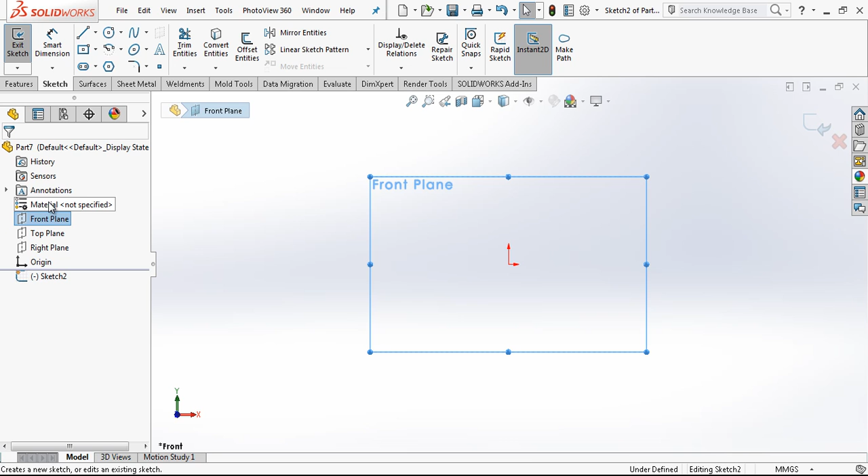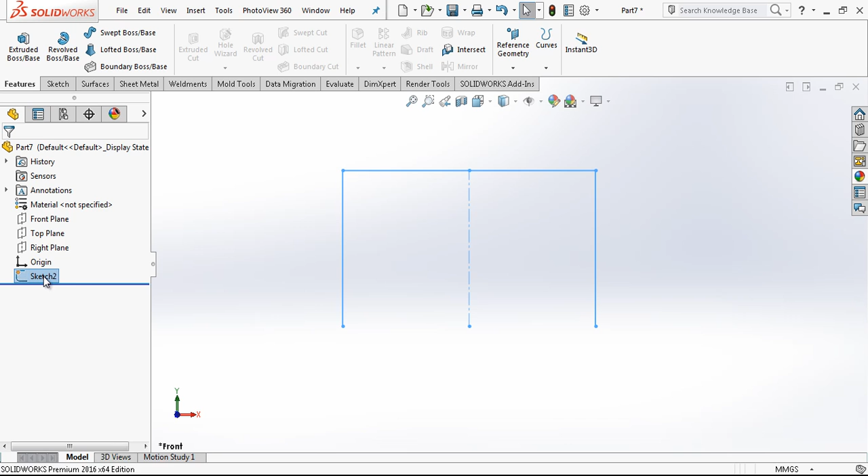Let's start quickly. In a new part, in front plane, I open a new sketch and start with lines. I'll draw half of it and then mirror it. This dimension is going to be equal, and we mirror it. This dimension is 150 millimeters, this dimension is 250 millimeters. As you see, the whole sketch is black, so we can continue to the next step to make an extrude with a line.

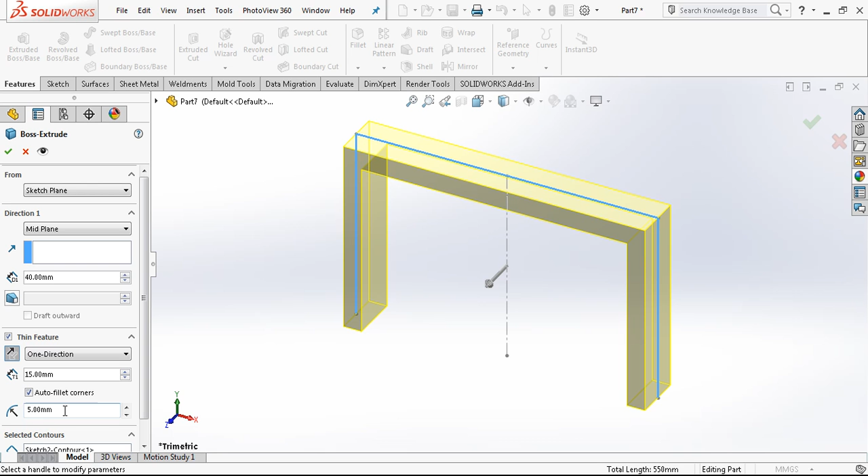To the inner part, we are going to create 15 thick and 40 millimeter wide. The corner is going to be reduced 20 by 20 inside, and ultimately out is 35. Then we are going to put some radius on the edges, 5 millimeters.

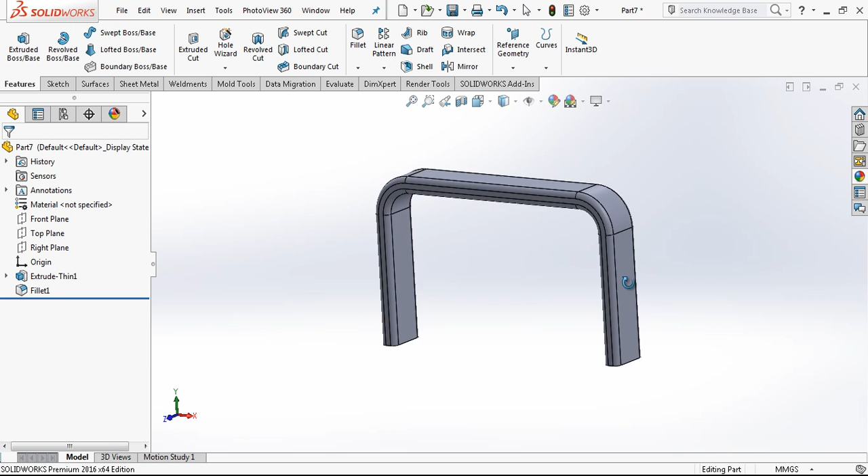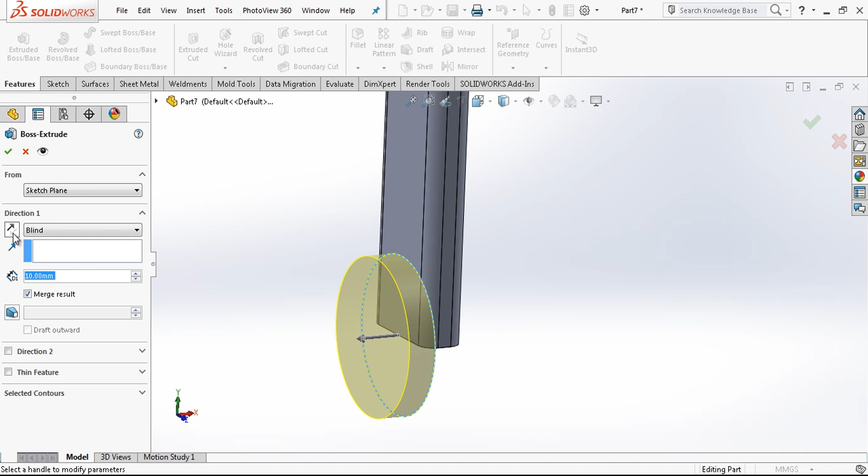That's ready. On the side I'm going to create in the middle a circle which is 55 millimeters, going to be extended 10 millimeters on this surface. The second direction is 15, already the thickness of material.

I want to make a 10 millimeter bow from both sides, equal. Then here is 25, and this is done. Just making a mirror.

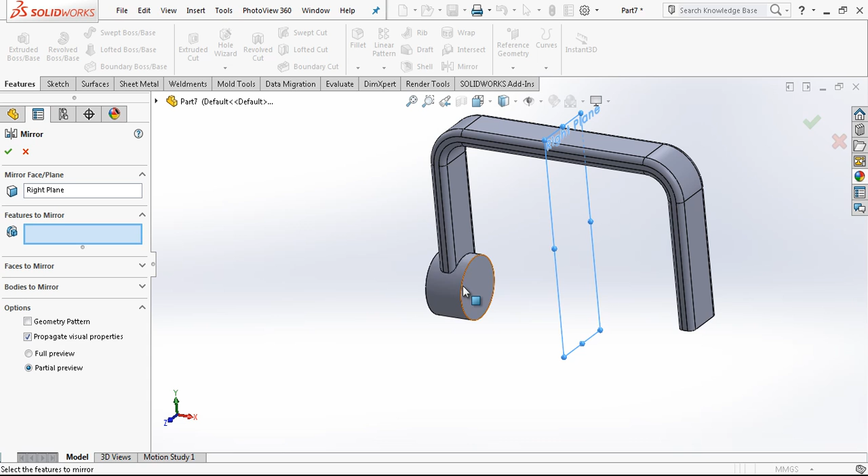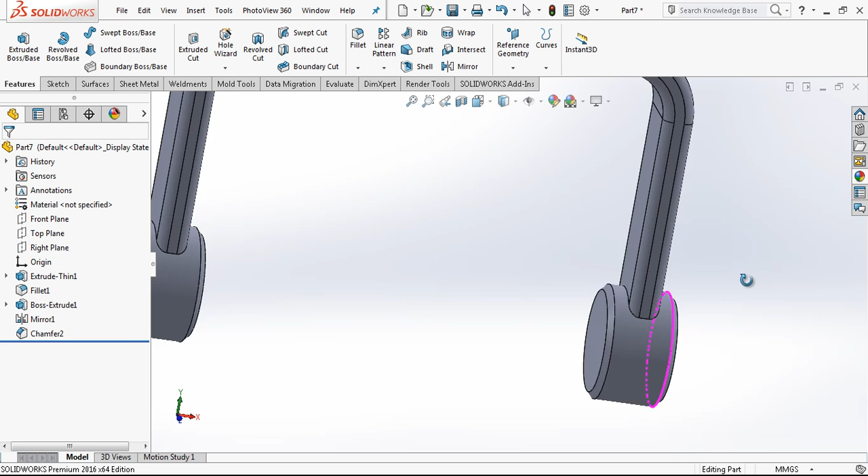Adding some radius on the corner, 3 millimeters - oh, 3 not 30. Yes, chamfer we added, by the way. I was thinking this is a cast iron part, that's why chamfer is not possible. Radius is always better for production in cast iron.

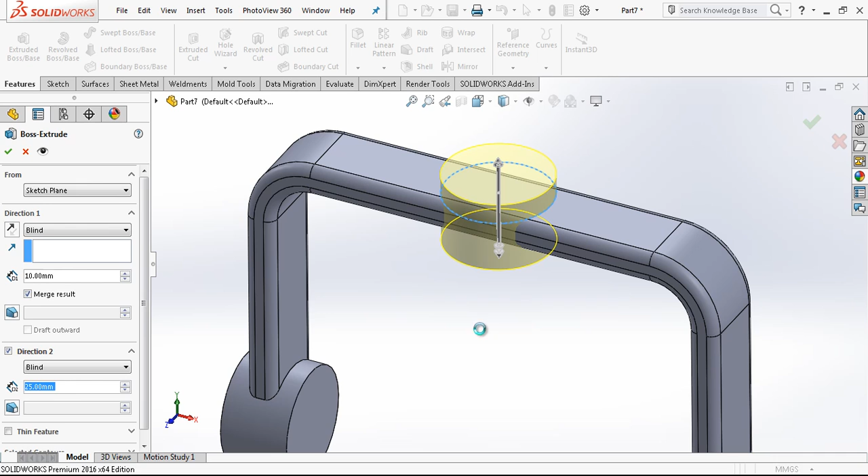55 diameter, we want 10 millimeters from the surface and same 25 at the bottom. This is also ready. I took fillet on the desired edges, adding our 3 millimeter radius.

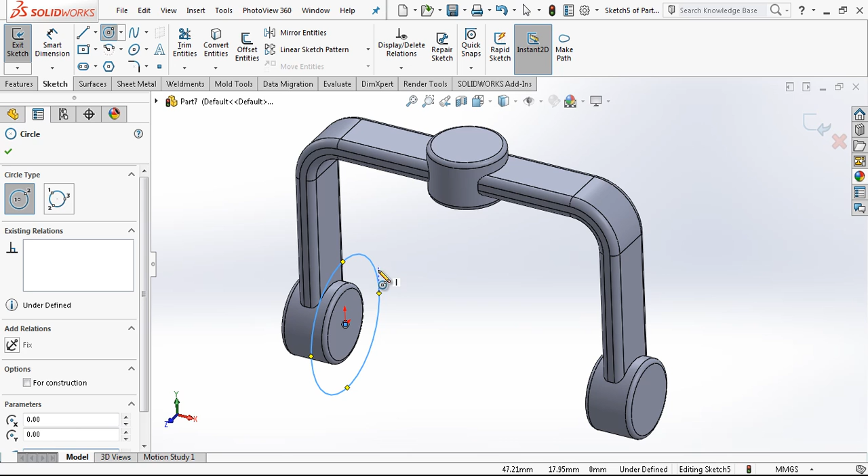On the surface we are going to create a 25 millimeter diameter and cut through all. And then here we create diameter 20. The most important part is now ready, in fact.

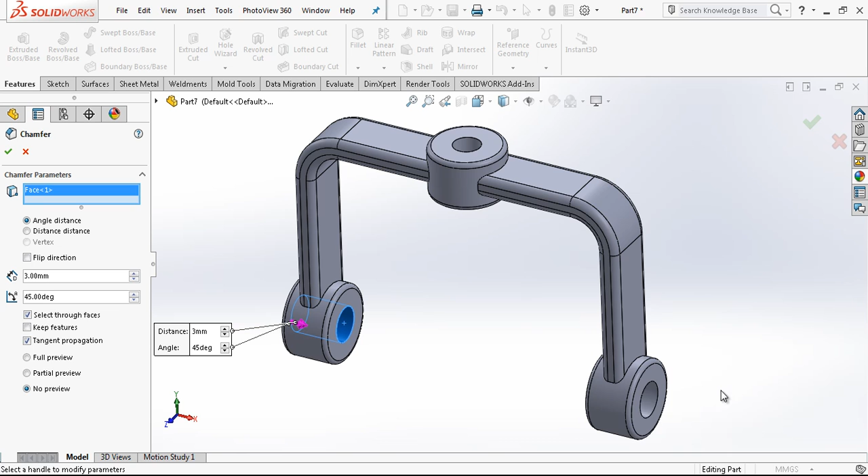We can add here some chamfers. If you have surface machines, then there will always be a chamfer. And we save it, and I'm creating a new folder - A1, let's say, A1 the main part. We keep it here. And the second one.

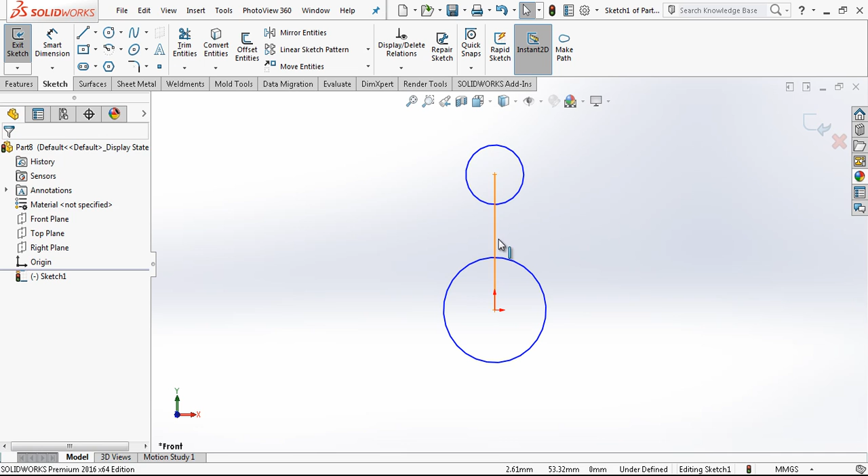We go create a radius, a circle also here. We just connect both centers. This is 75 millimeters, this is 50, this is 35.

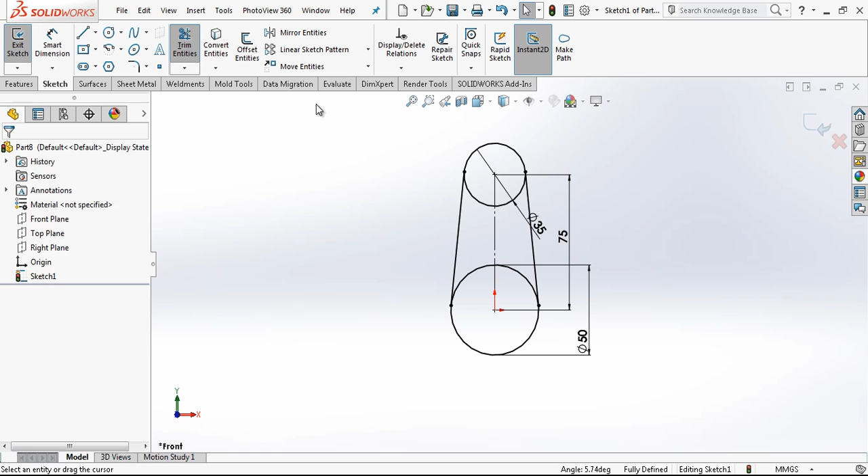And a line with the control button. We just add a tangency relation. With trim we press and remove unnecessary sides, and this is going to be mirrored on the other side, and unnecessary area removed again. Here 20, here 25 millimeters.

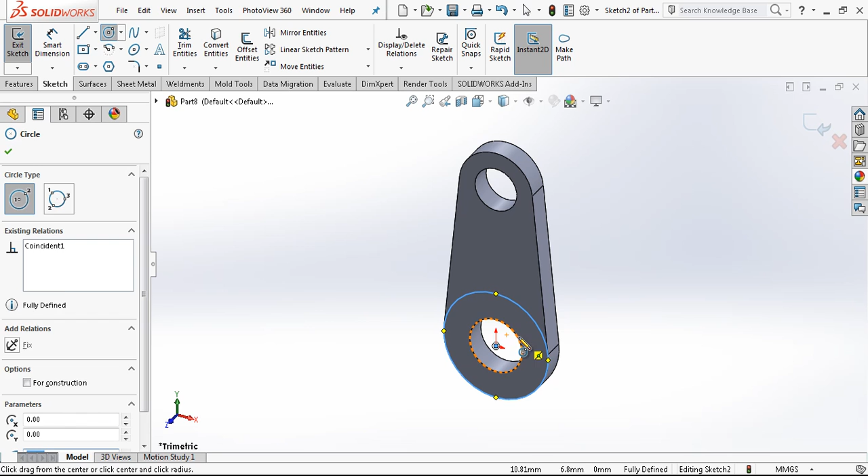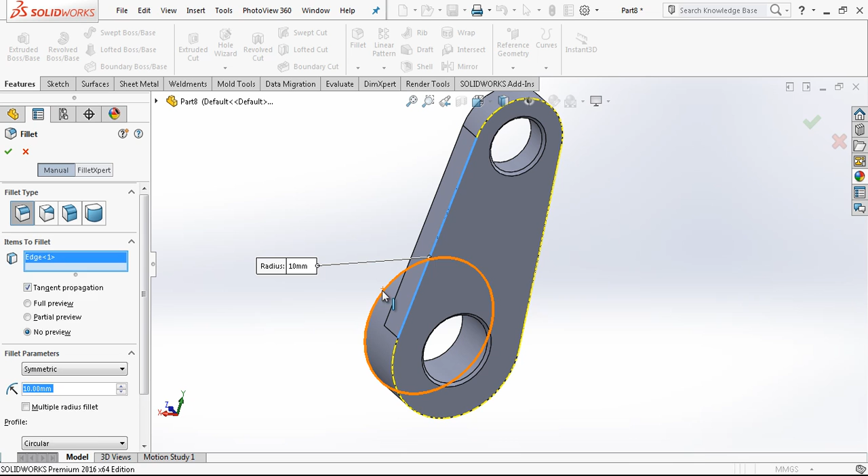Here 1 millimeter chamfer, outer surface is 3 millimeter radius, and here also 10 millimeters. The name of this is A2. A1, A2. Yes.

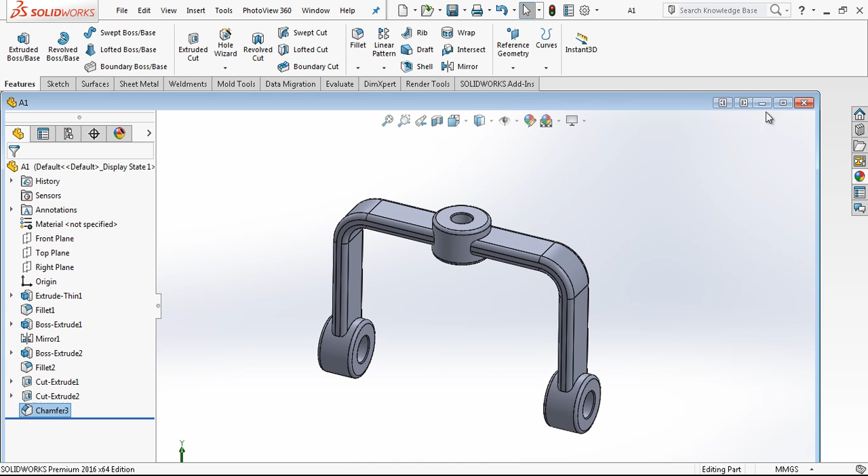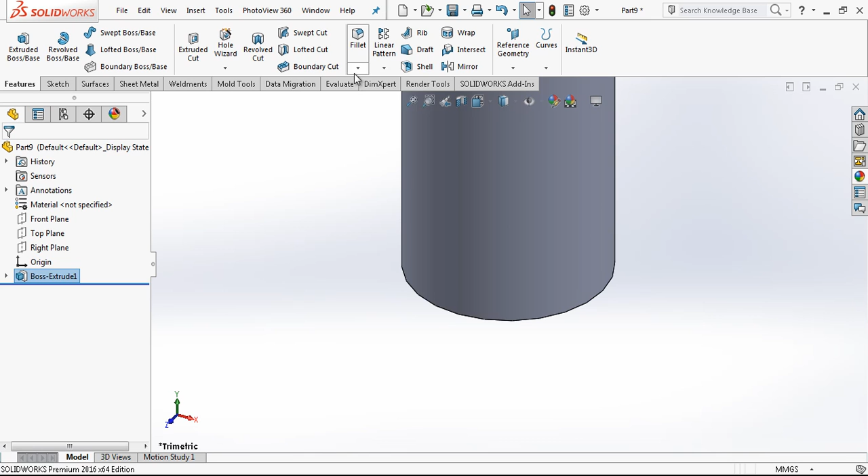Now we create a 25 millimeter diameter axle. The dimension will be 350. With chamfer, I just click on the surface and add 1 millimeter on both sides. The chamfer, because when you select the surface, the related edges automatically get the radius added - the chamfer, sorry. A4, we say.

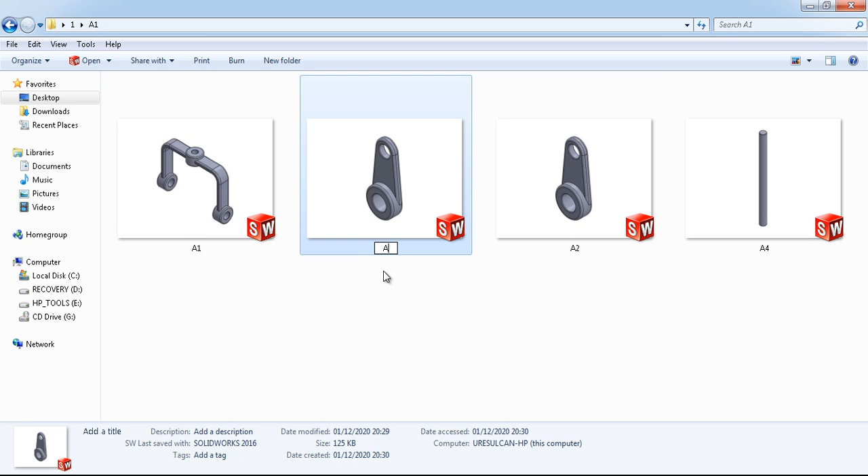Now I'm going to copy A2 on the edge of my file. I'm going to make A3 and open it, because in A3 the only difference is the axis. This is going to be 65.

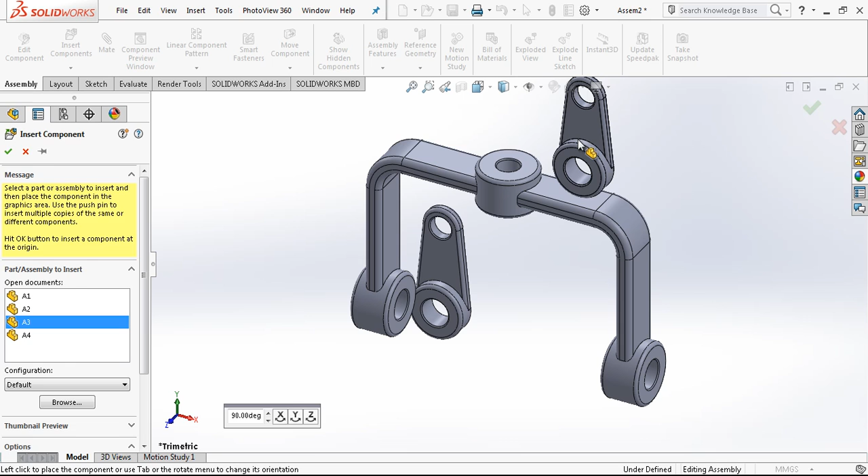Now I can create an assembly and start to show you the main idea. A1 was the main part, A2 was the side brackets, A3 on the top, and A4 is the axle here. Yes, we took everything into the assembly area.

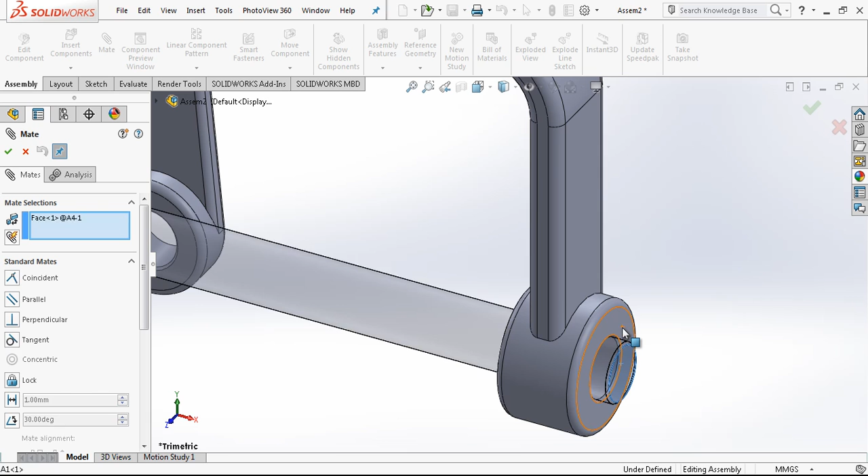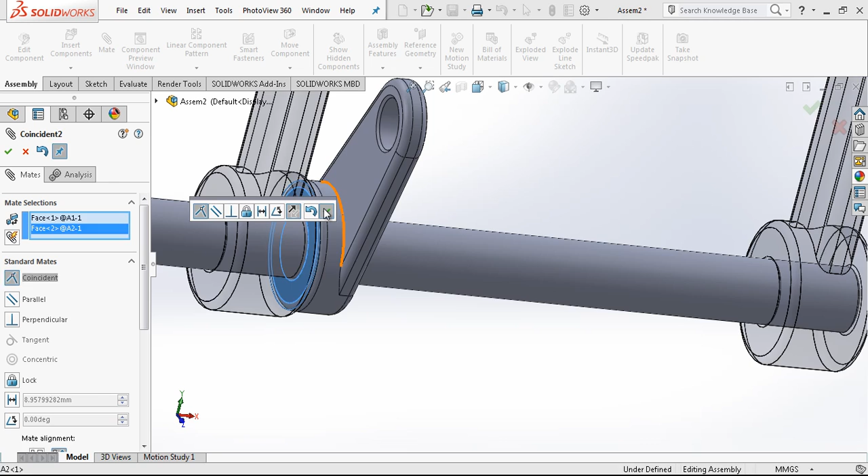We just added here a sketch relation, a mate. If you click a rounded surface and hold the alt button on the keyboard, you can automatically add relations. I made coincident on the surface, and I take one more time A2 and rotate it a little bit, adding - I have so little battery.

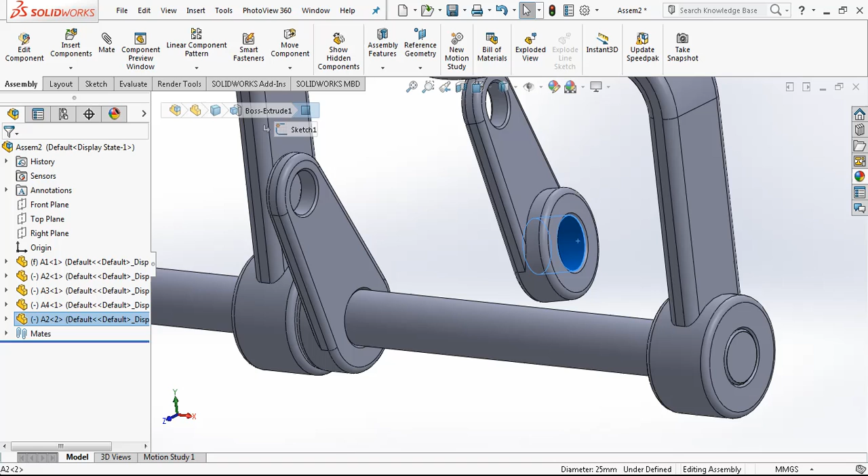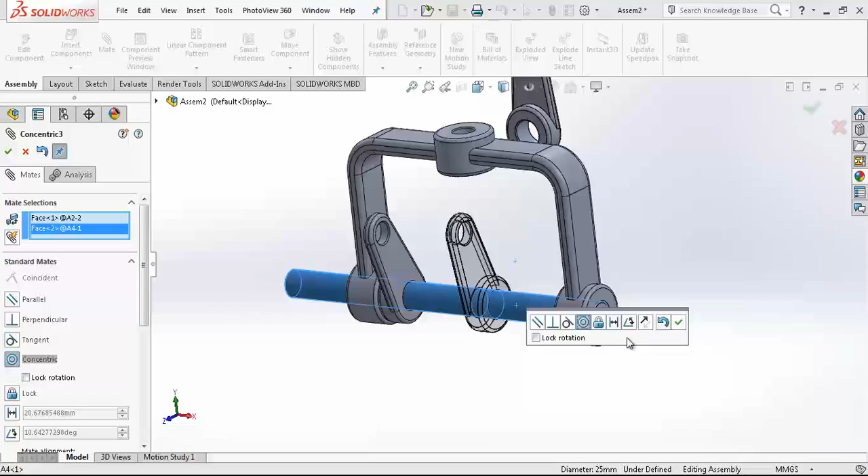Sorry. Yes, and then we're adding this relation, this surface to this surface, and these two surfaces are going to be equal, and this will be on the top area. Yes, and connected to this surface.

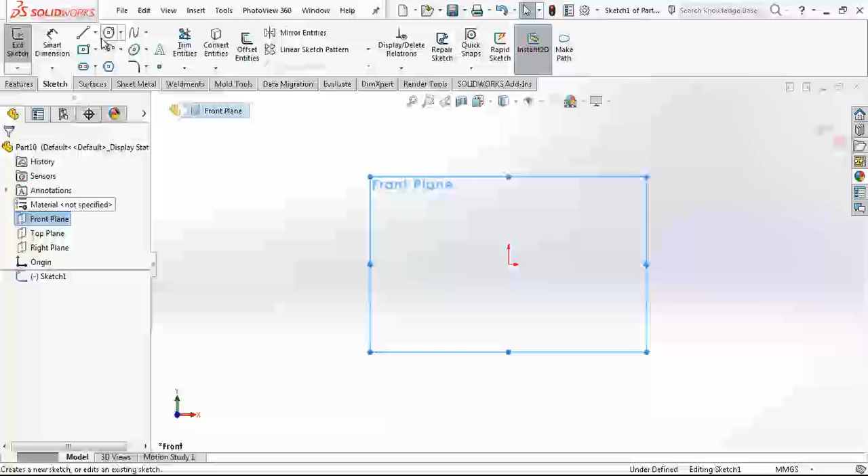And now we will have the axle again. I'm going to measure the surface - 180 millimeters long axle, diameter was 20, and then we just go create diameter 20, 180 millimeters on both sides, 1 millimeter chamfer.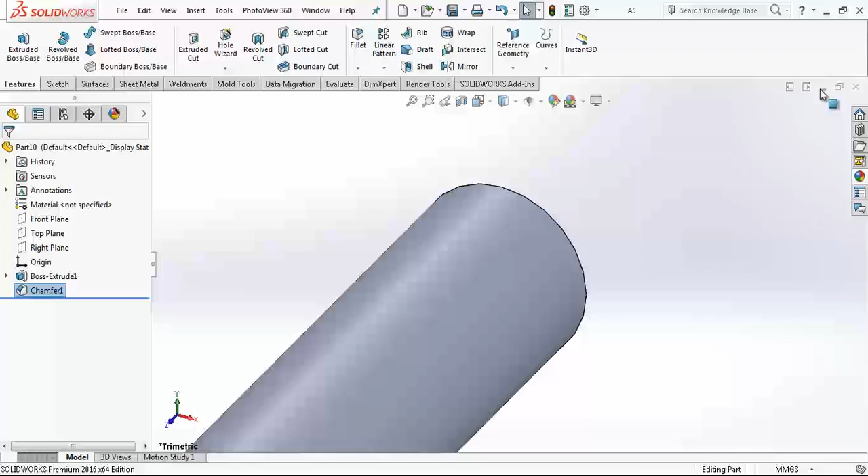A5. I'm not closing it, I'm just going to bring A5 here. Yes, A5 here. Let me just go connect.

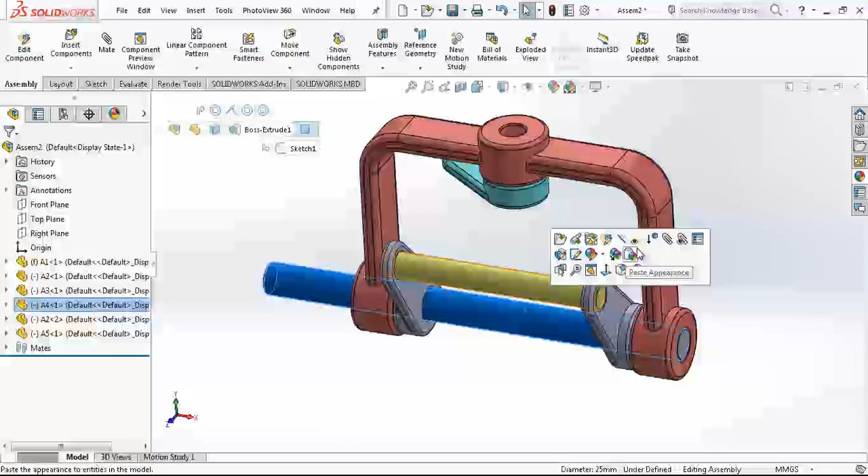With mates, here also we connect. Now we can start to give some different colors. This body is yellow. This guy is this color, and main body is something warm, and axle is here going to be this color, and this part going to be a color with green, let's say.

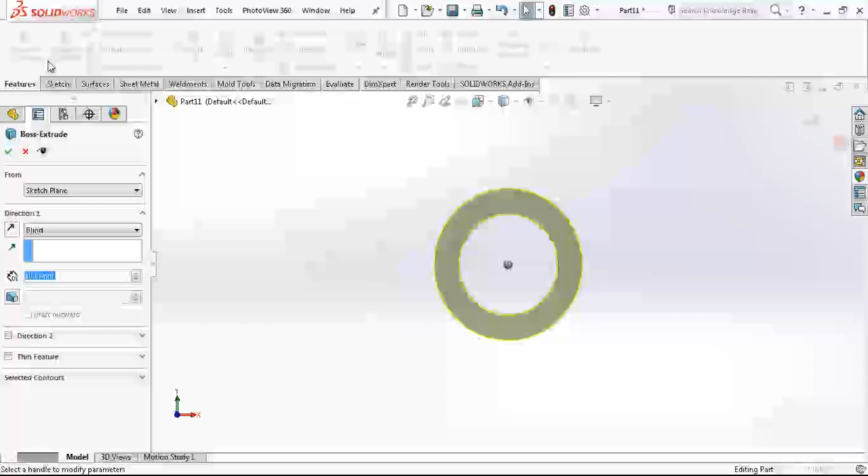Yes, the last part that I should create here going to be a bush with a pin on it. We know our diameter is 20 by 30, 20 by 30, and the width is 35.

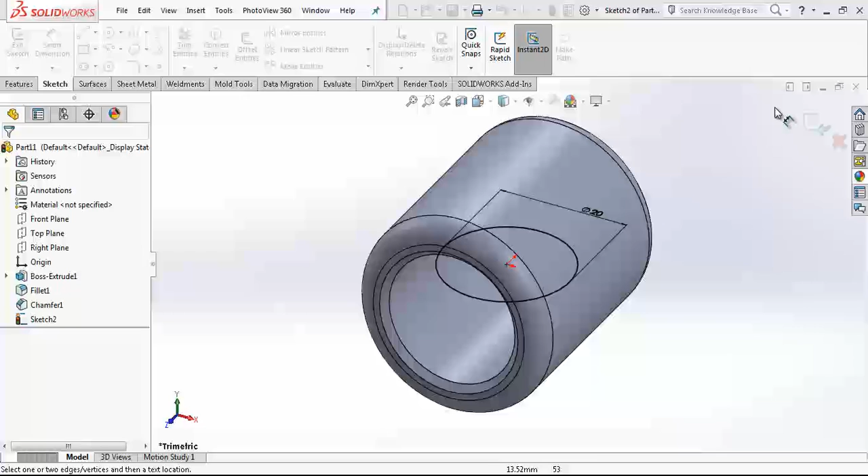Put some 3mm radius, inner 1mm, and on top plane I'm opening a sketch, creating a 20 diameter circle, and 35 I just make offset 10mm, we say 11.

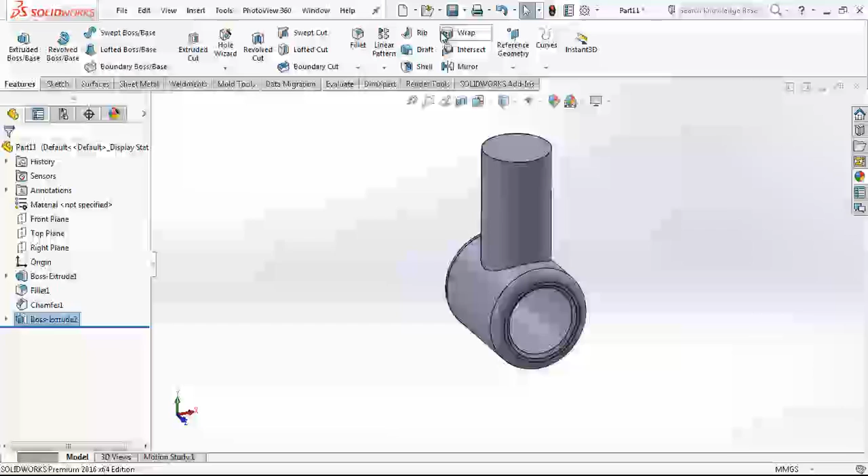Yes, we need something like that. A6, and the last part we are just going to add it. A6 I took and give a mate here, then connecting on this edge.

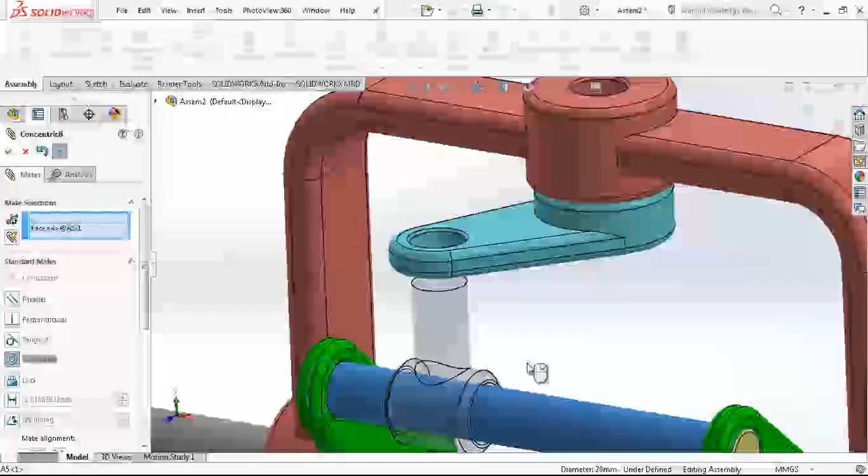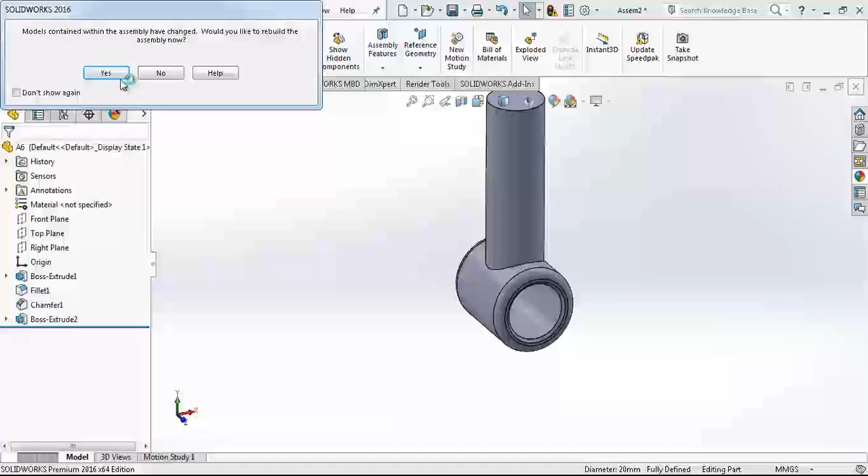Now I realize our pin is a little bit short, so we can just open this part and make it 50 or 60mm. Let's make sure. We will see. As you see, we have a little bit of a problem when we are turning. It is touching here. I think it should be around 10mm smaller.

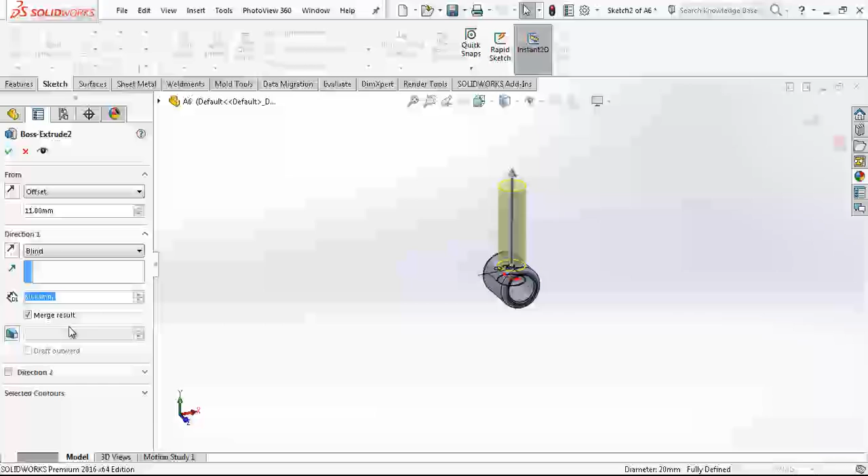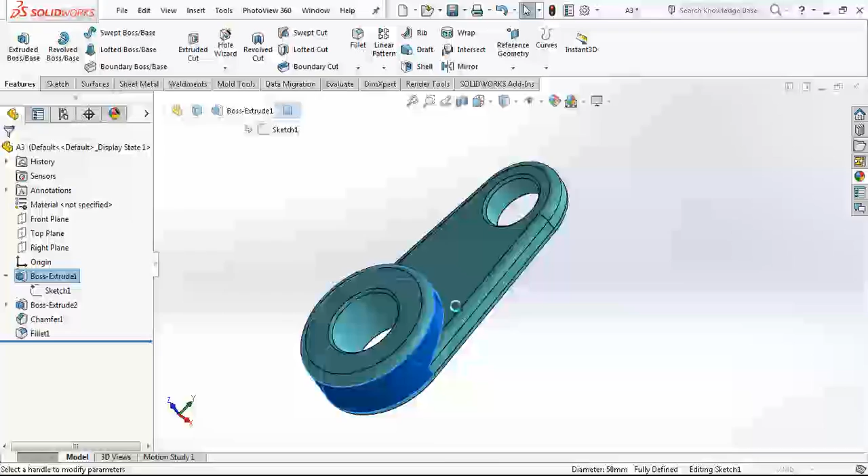Yes. Now we are having a problem here getting short. Then we are going to increase this thickness, and let's make it 20.

Now we're going to be inside of range. It is not completely going out. Yeah, it is not bad. It is just an example, it's not a production model, that's why I will not go so much into details.

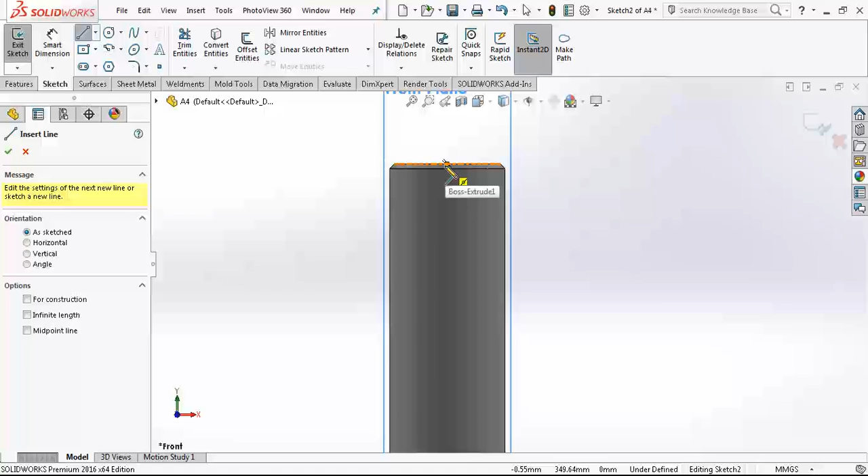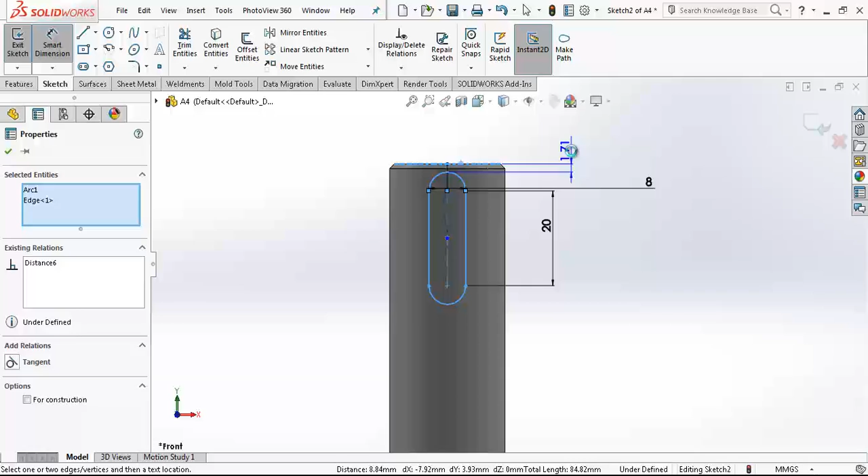8mm, and let's make this 20, from the beginning 10, and from this surface I'm going to 8mm, and I want to see where the keyway is located now, in which surface.

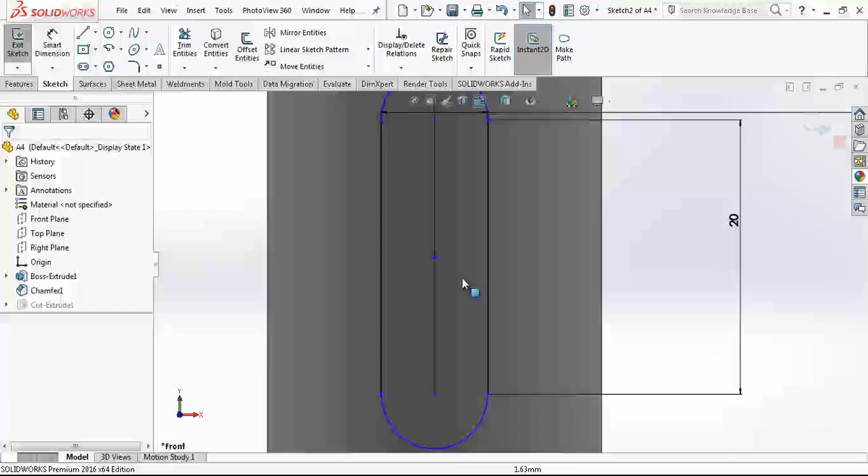It is located in the wrong area. Then the easiest thing is going back and editing the sketch, and instead of making it 10 here, we just go move it to the area where we want to see. This is 15, let's leave it like that.

Last operation, yes, it is almost here because there is no keyway on the bodies and we don't see them. The first thing here, we just go create on this area a keyway which is 6mm high and 32mm wide.

All these keyway dimensions are the standard dimensions, I'm just giving you random dimension. According to the axle diameter and hole diameter, you have standard dimensions, normally we are not giving these things from our mind. Now we are going to measure where the other keyway is going to be placed. From here to here 35, and from 35 to here 20. Then we just go add 35 to 20.

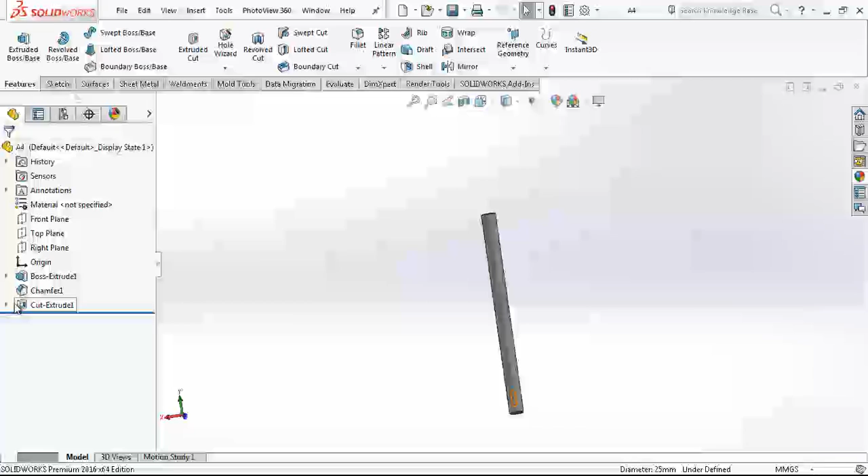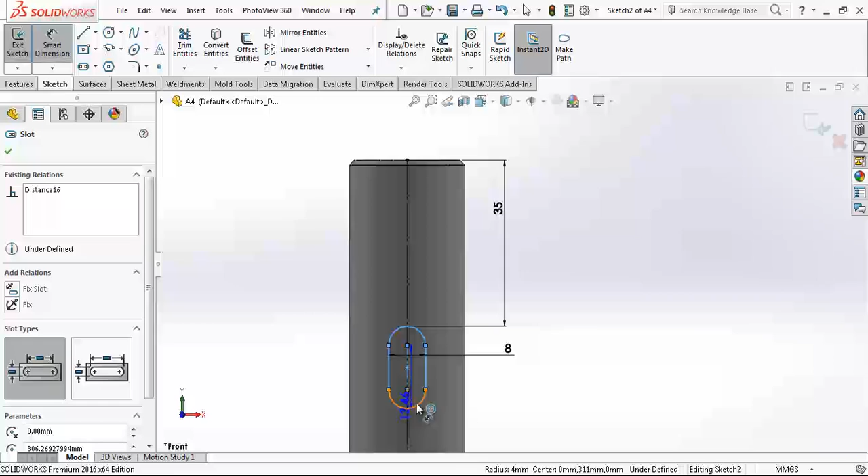Yes, 8mm. With shift button I'm making 35. Again with shift, clicking this radius and this radius, this is 20. We can make it mirror.

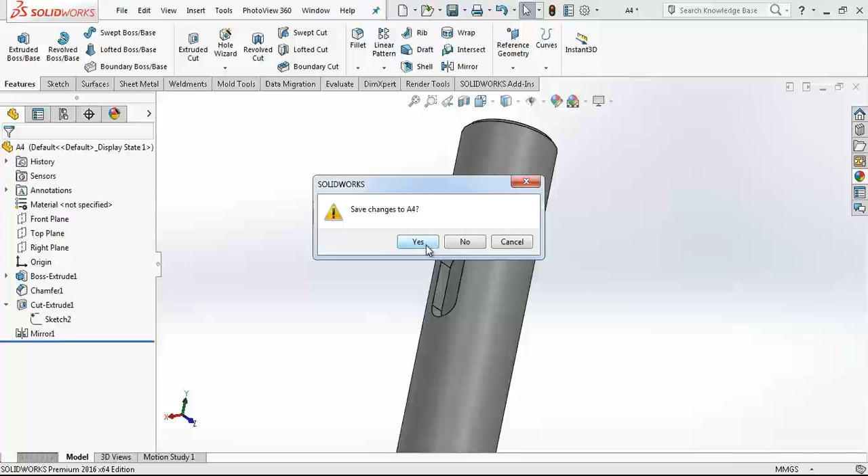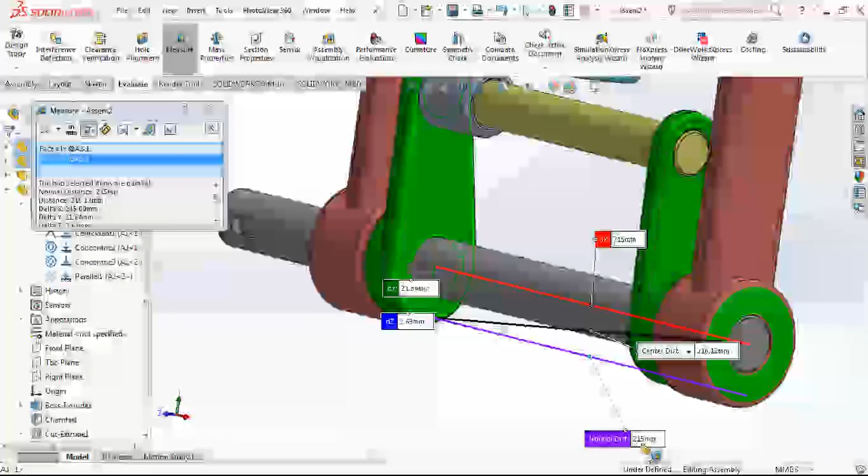Yes, turn a little bit, and here to there it is parallel. Now when I move it, you are going to see. And the second, from beginning, for the second keyway position, 215mm and then 20. We are just going to edit this sketch.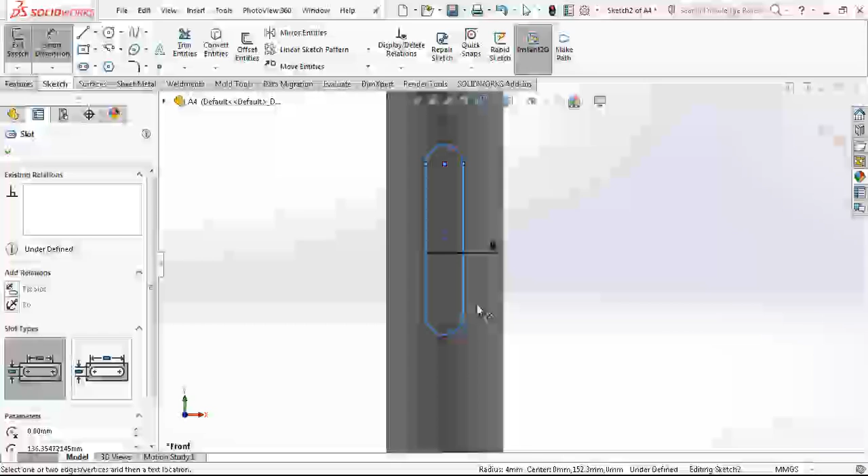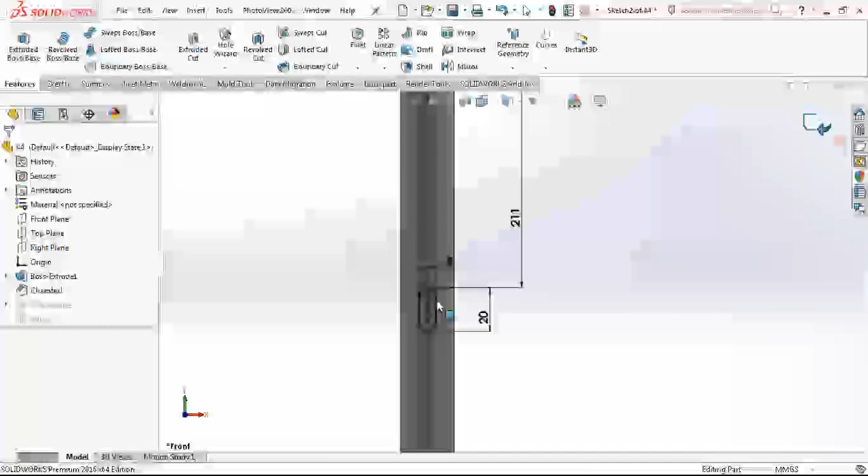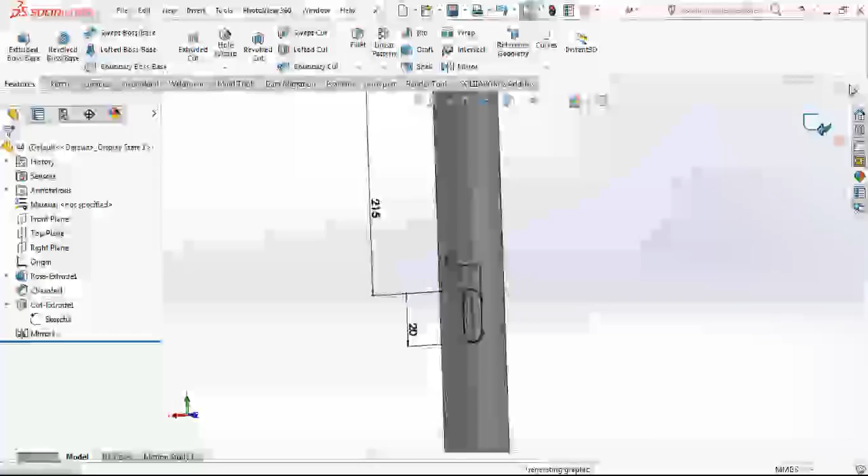215, I think we said 8, with shift from out 20, and from here to here 211, if I'm going to be right, I'm thinking, but I will check it. I think we must go 5mm, 4mm further. Two, one, five, and then we will be finishing our model.

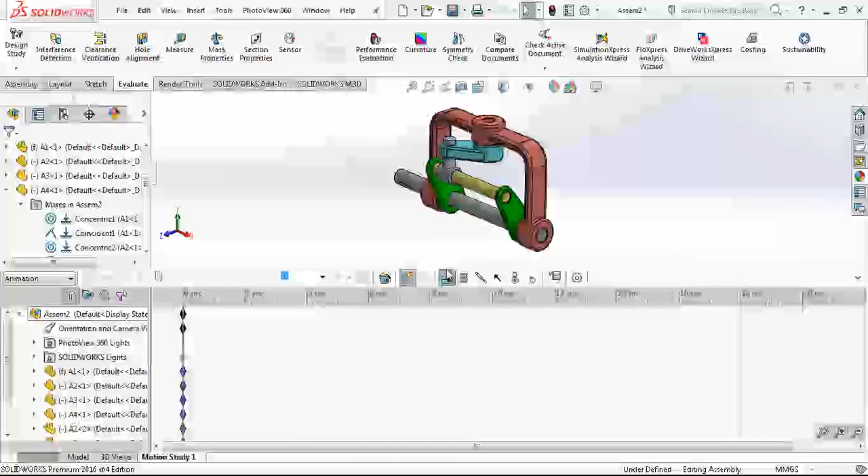Exactly. Now I'm going to give here the basic motion animation to see what's happening. We are going to choose an engine on this circular surface, not so important, and calculating. We can make slow motion and check again.

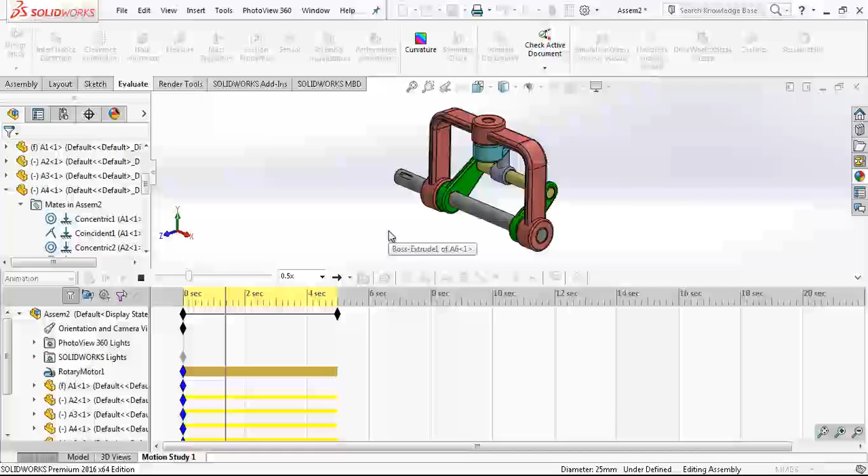It is a really nice model. Yeah, I like this kind of mechanisms. I hope you are also enjoying and you have learned something from this video. This is not something for production, this is just a kind of presentation of an idea in a production way. Everything here will be different, from the radiuses to how we are going to couple and keep these axles in place. I'm not going to go into so much detail.

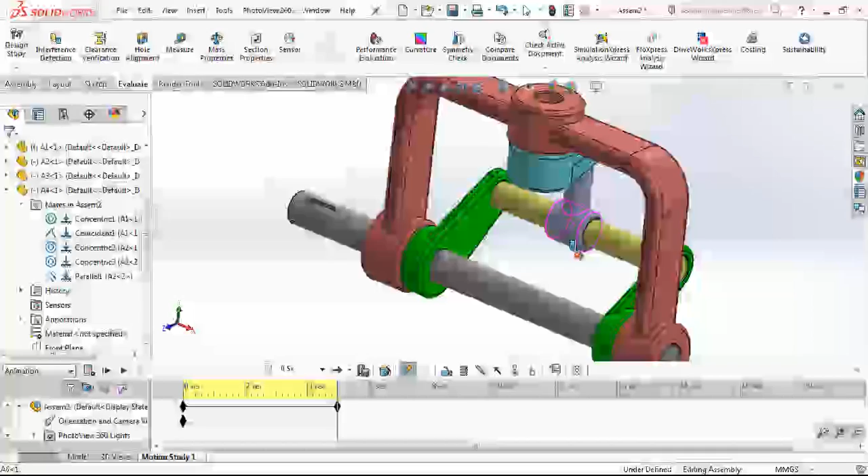Maybe one day I can make a full production modeling.